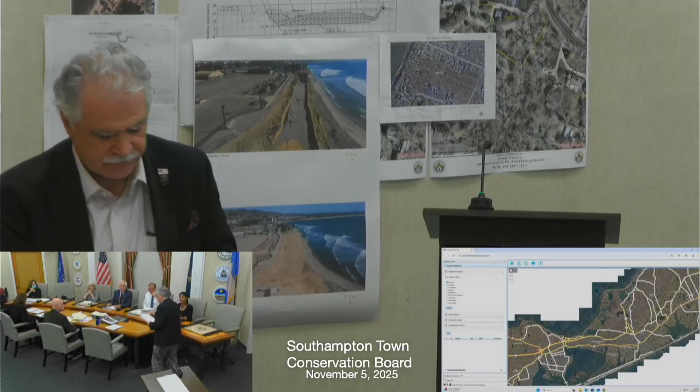One sec. I was requested to bring hard copies for everyone, so I will just hand them out. You give me the whole pile, I'll hand it. There's three there. Does Marty have one? I've seen it already. Oh, you've seen, all right, well, that's what you emailed. And I have one back in. See it? Yeah. Did you get one? I got it.

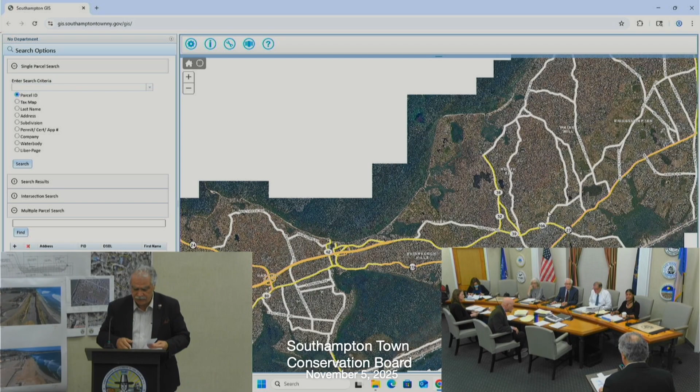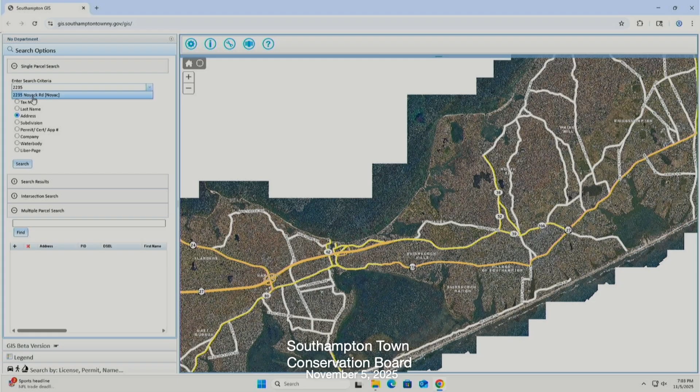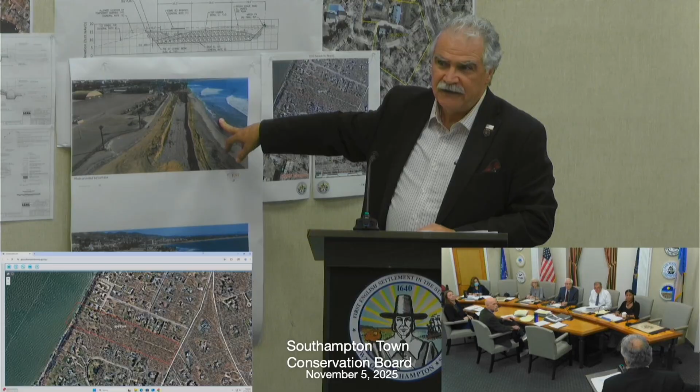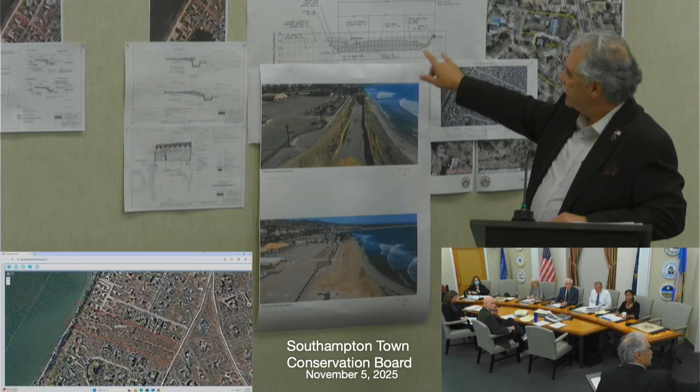So I wanted to thank the chairman for encouraging me to provide for the board a review of dynamic revetments, cobbles, berms, et cetera. I think in there you'll find that we've done extensive research on these devices, which are being used very successfully. Your timing was excellent because I ended up at a conference in California about two or three weeks after the last hearing, where this project at Surfers Point in Ventura, California, a cobble beach, actually won a national award. This is the newest section, but the original section was built over five years ago, and it's been performing extremely well. I provided you with a typical cross-section of what that looks like.

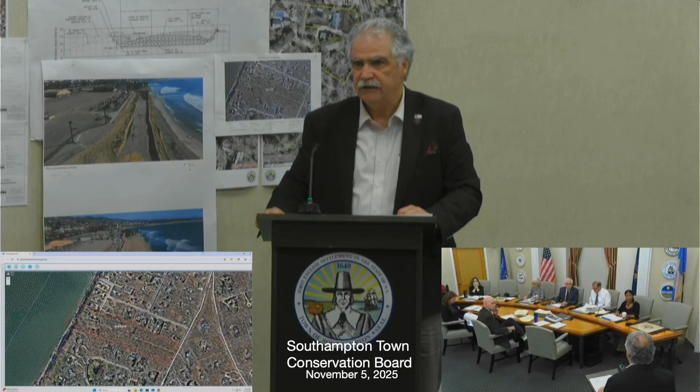I'm happy to answer any questions for the board. I think the dynamic revetment is going to work very, very well on this property in conjunction with the vegetative bluff stabilization, which we have also proposed. I agree, thank you. And Marty?

Good evening, Marty Shea, Chief Environmental Analyst for the town. The construction of a cobble berm is actually an approach that is consistent with environmentally less damaging practicable alternatives, which I have asked to be evaluated in this case and other cases where conventional stone revetments are planned.

Just for the benefit of the public, what dynamic revetment involves is the placement of considerable amounts of bay-compatible and beach-compatible cobble. The cobble is not fixed, so that it models a natural beach condition where you have considerable bay cobble that's washed up in storm events. The cobble is loose, so it allows the water and waves to shift and change the location of the cobble as much as possible.

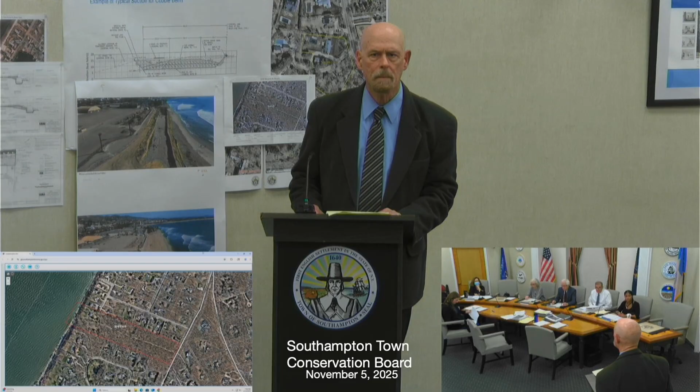Ideally, as mentioned at a prior hearing, there is not a great need for any armoring at this beachfront because there are no structures threatened. So initially I had asked that conditions be left to remain and recover on their own, possibly supplemented with a lesser amount of cobble.

And the gabion baskets are a very fixed structure. Their placement results in beach loss, and their presence also eliminates shoreline habitat for shorebirds, for crabs, for horseshoe crabs, for diamondback terrapins. So a major plus of the applicant's modified plan is that they are now willing to remove those gabion baskets in the interest of creating a continuous wide stretch of naturalized cobble beach.

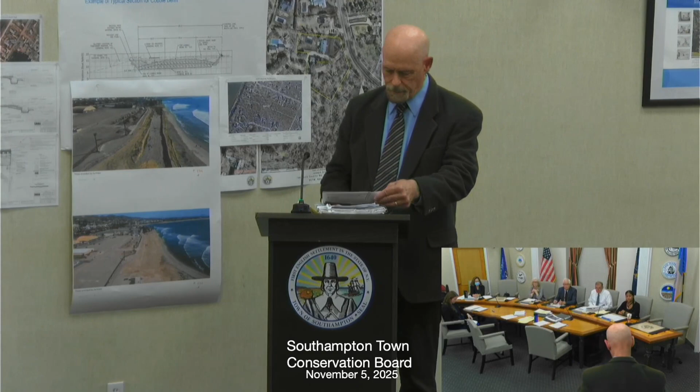To give an example of the wildlife threatened by jute netting, whether biodegradable or not: some of our native snakes. What happens is when snakes try to get through the jute netting, their scales get caught and they become entangled. Unless the netting is monitored constantly and those snakes released, they die.

Bird life is also threatened, because their talons very easily get caught in the jute netting. Small mammals can be affected, as well as deer. I saw at least one case where a fawn had caught its leg in the jute netting, and because of the sheer bluff, it snapped its leg trying to get out.

So I would highly recommend against the use of jute netting as part of any revegetation. I really don't see the need for revegetation. I think we want to get that cobble placed and then allow the area to naturally recover. Erosion is a natural process, so you'll still see bluff erosion, which is beneficial as it contributes sand to the beach. But I don't think there's a need to actively interfere with natural recovery by planting beach grass or other vegetation.

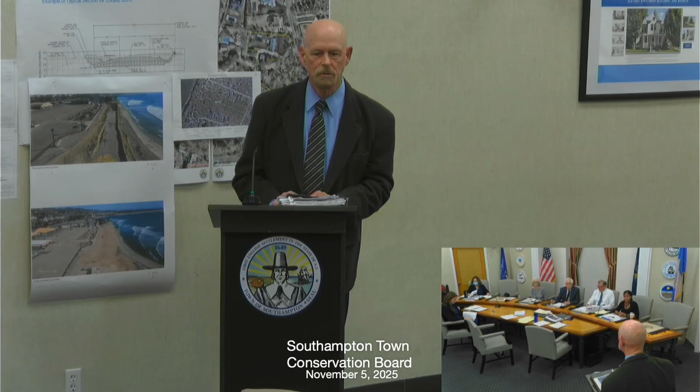So I'm recommending that the hearing be closed tonight. The applicant will need to come forward with a detailed drawing and revised survey, with greater specificity regarding the size of that cobble, the methodology for placement, and access. I'm sure I can work well with the applicant to provide those refinements to the drawing in a form acceptable for wetland permitting.

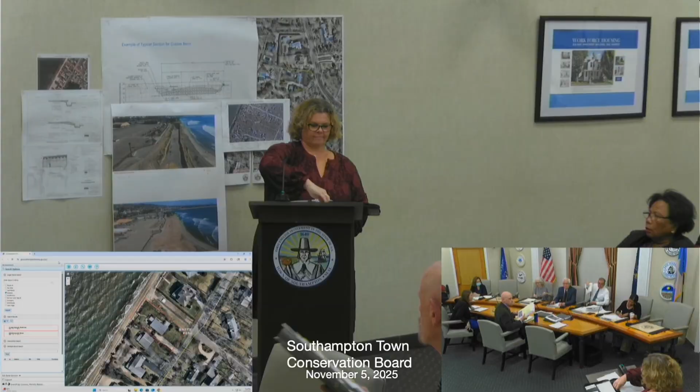We've talked about this for a while too, and I've seen the new plans. Thank you for presenting those new plans. And once again, as in the previous application, these look amazingly approvable. Fantastic.

Daphne Vaughn, Surfside Environmental Planning for 37 East Shore Drive LLC. The last time we met was middle of August. I did submit this package to the file on Monday. It includes a letter detailing all that we've done since that date, primarily two things.

One, my office went out and did some reconnaissance on beach measurements and consistency between the areas of revetted properties to the north of my client's property and the unrevetted properties from my client's and two properties south. We saw consistency with revetted versus unrevetted beach, and that's all detailed in here.

The second thing that my client did was hire Keith Masseria, an engineer who's with me here in the audience. And we came up with a revised plan that is in your submission package. We basically changed it from a solid revetment to scattered piles of medium-sized 300 to 400-pound rocks.

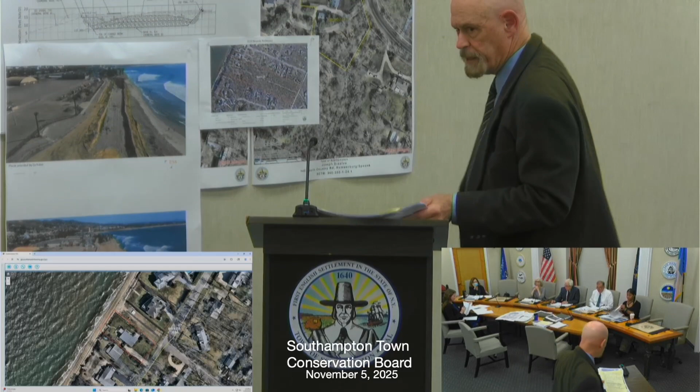Good evening again, Marty Shea, Chief Environmental Analyst for the town. I'm happy to see that the plans have been significantly modified to abandon the former proposal to install a fixed rock revetment, because revetments upon exposure can result in downdrift impacts, accelerated erosion, and beach loss, and also destroy habitat for shorebirds and other wildlife.

The house at present is not endangered at all due to the beach erosion that's occurring. It's actually located outside of a flood zone, so there was no imminent need to be very aggressive in terms of armoring. The current plans are well aligned, as the applicant alluded to, with early recommendations and sketches that I had provided to the applicant that centered on enhancing beach stabilization by placement of a bay and beach compatible cobble with a cobble berm created along the escarped headland, and with a naturally vegetated buffer established landward of that cobble.

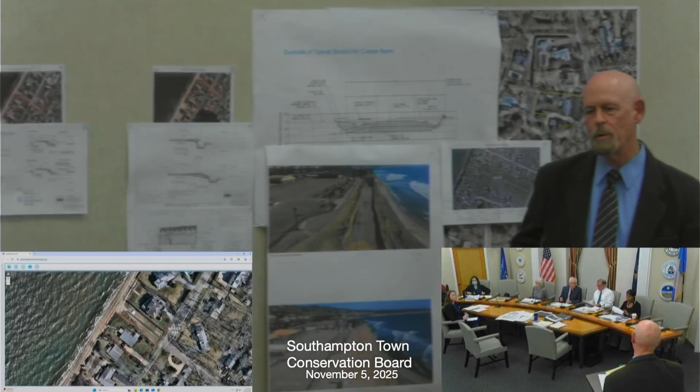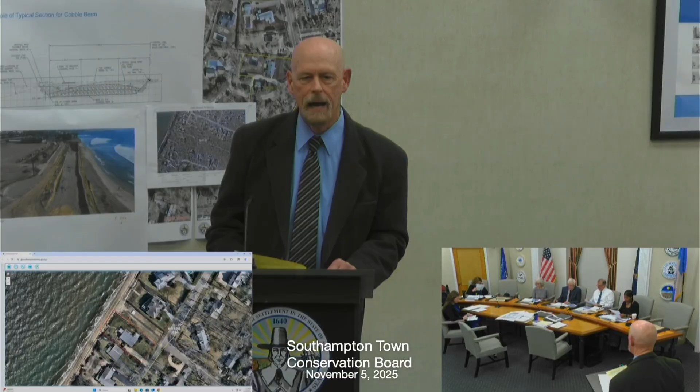So what is actually happening is, when a little bit of the lawn is being eroded and beach is reappearing, we're actually seeing a natural recovery to more extensive beach, as historically, naturally occurred at this site.

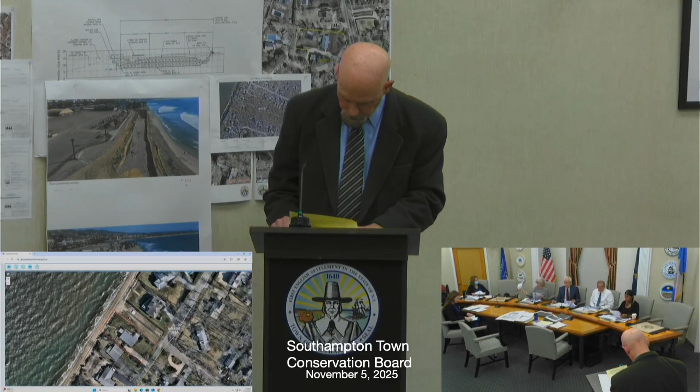So I am speaking in support of the modified plan. I commend the applicant for evaluating practicable alternatives that would have less environmental damage than a stone revetment as required by Chapter 325. That being said, the hearing can be closed tonight.

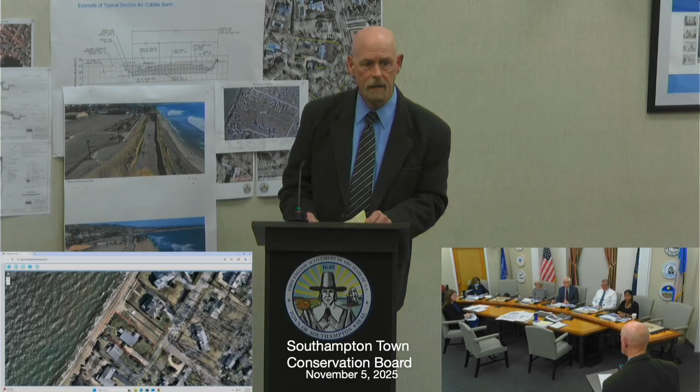Thank you, Daphne. One of the things we look at typically on a shore hardening structure such as this is the impacts that that structure might cause on the downdrift parcels. To mitigate that is a challenge, and many times it cannot be mitigated, which means it's very difficult for us to find a way to issue a permit for that. The way you've changed this around removes that concern. It appears that will not be an impact, and that's why this is an application that meets the criteria for issuance of a permit. So thank you for the work you've done.

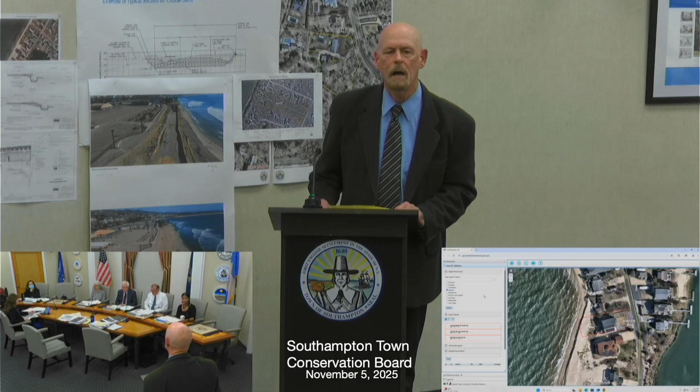A large enough footprint has been set aside in the event that they want to entertain installing an IAOWTS in the future. It also leaves sufficient area for any redevelopment plans that may come forward at some later date.

The benefit of this plan is that I don't see it resulting in significant downdrift erosion. That, of course, was a concern when a rock revetment was proposed, because south of this property the beaches are currently unarmored. So I am no longer concerned about downdrift impact.

I think this is a reasonable approach for the property. Ideally, when boulder fields are created, they're intended to be modeled after natural rocky shorelines, and I would want to see some of those boulders out in the water, below mean high water, so they can break up wave energy and tidal surge sooner before it hits the main beach.

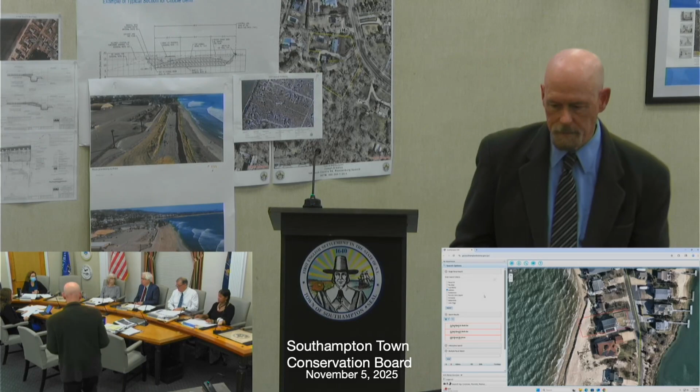Is there anyone in the public who would like to speak on this application?

Good evening, everybody. Thank you. My name is John Petrollo, and I own the house on 31 East Beach Drive, two houses away from the proposed project. I am downdrift from their house, and I am opposed to any form of rocks being added to the beach.

I am opposed for many reasons. First, I am really worried that it will cause increased erosion to my property. Most hardened structures are shown to cause downdrift erosion, and I feel it's likely to affect my property negatively. I'm worried it'll have a domino effect of more and more rocks being put on the beach as one homeowner after the next finds the need to prevent erosion caused by their neighbor putting rocks on the beach, and then it'll have to be done by the next property over.

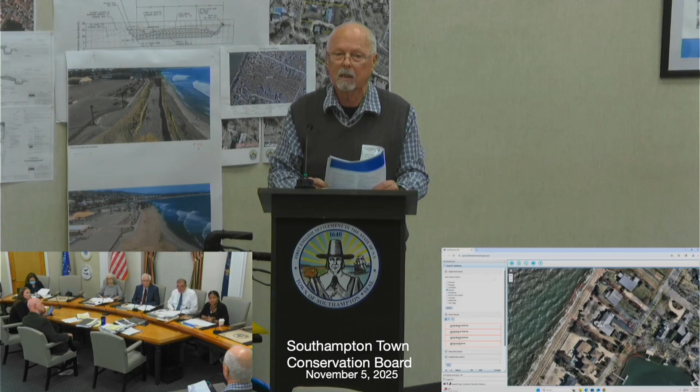So that domino effect, I'm worried it'll transform the most lovely crescent sandy beach into a pile of rocks rather than a sandy beach. I think it's likely to damage the environment, and likely to be a barrier, as more sand is washed away around these boulders, to beachcombers walking on the beach.

I appreciate that the original solid rock revetment has been changed, and I think that's a movement in the right direction, so I do applaud that. I would just like to state that I'm worried about the future of our beautiful beach, and that this will be a negative impact in the long run. Thank you.

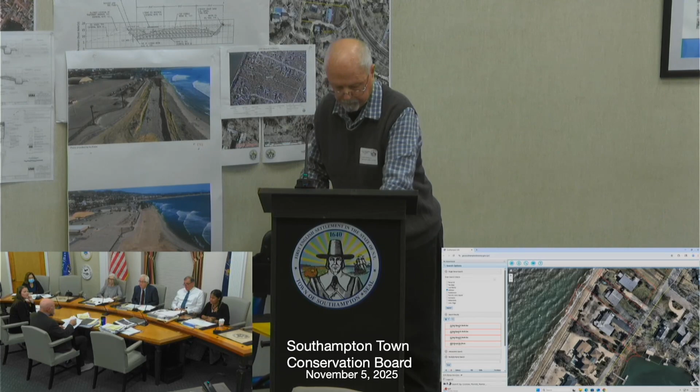Marty Shea, Chief Environmental Analyst for the town. The comments offered by the last speaker may actually relate to the next public hearing, as I believe he indicated his residence is on East Beach Drive. The hearing that's open right now is for a property on East Shore Drive, but the hearing for East Beach Drive is coming up next.

And at the property we just discussed at 31 East Shore Drive, they're no longer proposing a revetment — those plans have been abandoned. But as we get into the next hearing, you'll learn that there is a fixed stone revetment proposed at that property. I may be wrong, but I'm just offering that for clarification.

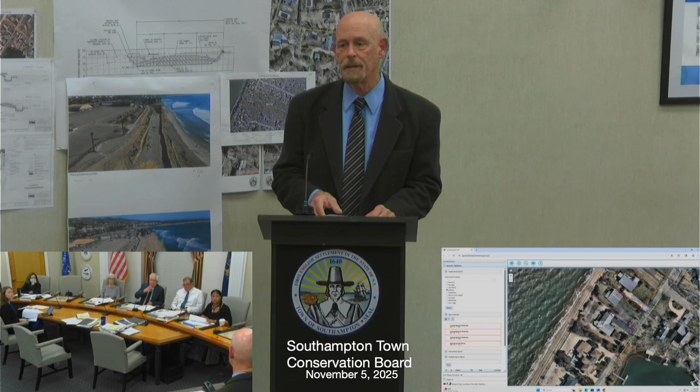So we're going to take those comments for the next hearing and delete them from this hearing. Is there anyone in the public who'd like to speak on this application? Is there a motion? Motion to close the public hearing. Second. All in favor? Aye. Opposed?

Case A025019, Stephen Tempesta and Jennifer Tempesta. This is a new public hearing, it has not been opened yet, and we do have affidavits of posting and mailing in compliance with the town code, so the board does have jurisdiction. Thank you.

This is the same. Same package? No. Thank you.

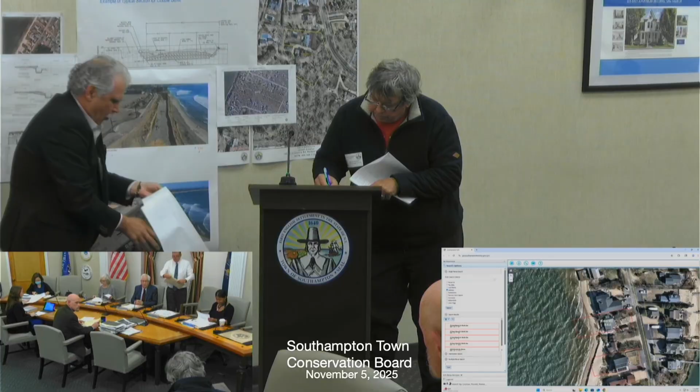If you bear with me for just a moment, I want to hang these photos up. I didn't want to cover up anybody else's exhibits, so I waited until just now. Yeah, got them right here. Probably just a file, but I can hold on to them. Yeah, no, I didn't see them.

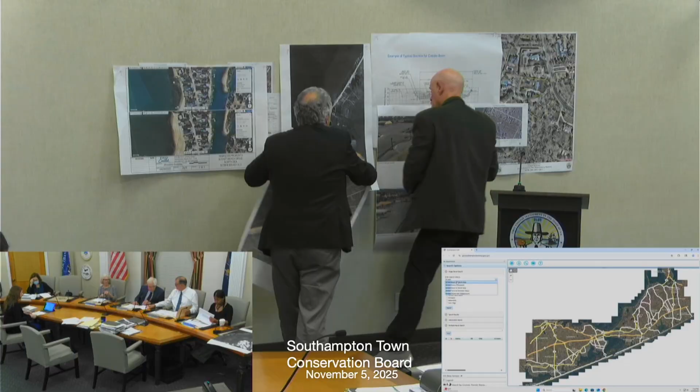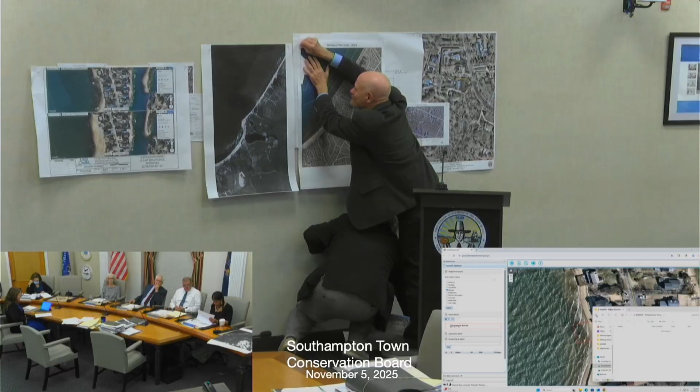Nothing like walking around the rest of the night with push pins in your shoe, you know. It'll be the first time. I'll take it. Yeah.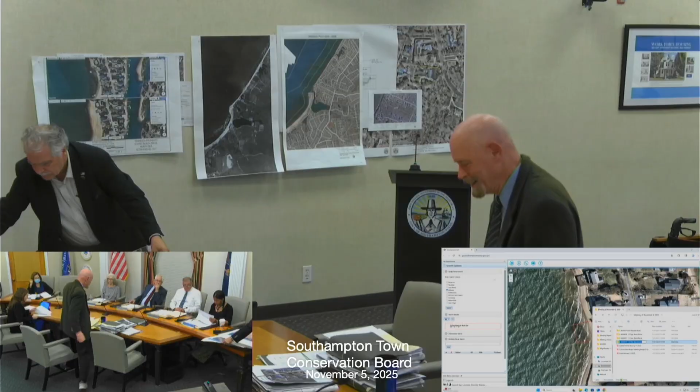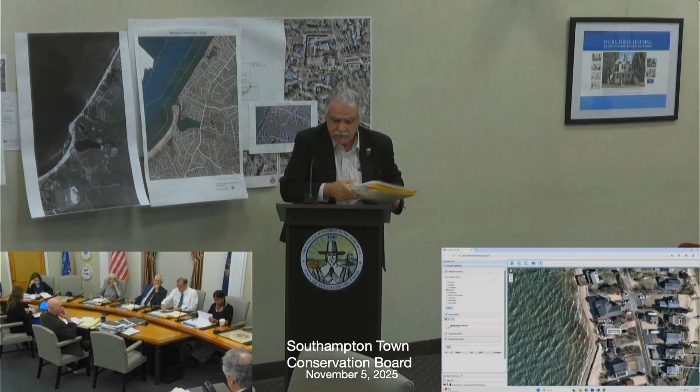For the applicant, Aram Terchunian, First Coastal, Westhampton Beach, New York. Thank you for the opportunity to address the board.

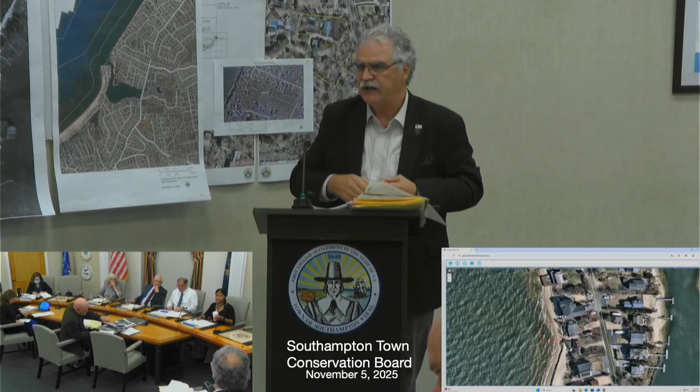In the original application, we supplied a project narrative, and I don't want to go through every page of it. I know this board is very thorough and reads all the massive materials we generate. But in this analysis, we first looked at what's going on at the immediate site, and then looked farther to ask why that's happening. So this is just a blow-up of a diagram that's in your narrative.

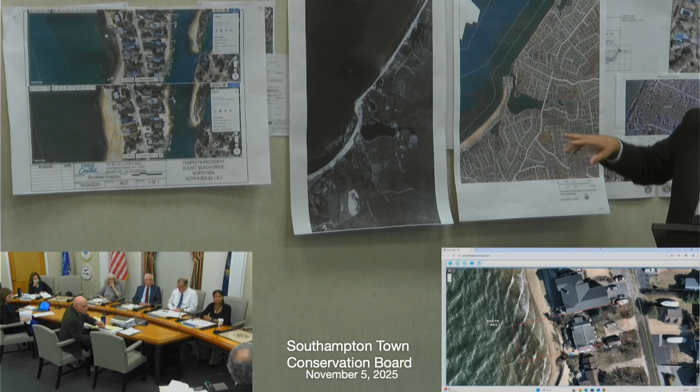I realized tonight when I was going over my work, it's actually a scaling error. I thought it was 1 to 30 inches, but it's actually 1 to 60 inches. So instead of 37 feet of loss in 2 years, it's actually 75 feet of loss in 2 years.

This situation, I would like to persuade you, is unique. This is not a case where an updrift structure is reflecting wave energy and causing downdrift erosion. This is human intervention at the governmental level that has completely changed the sediment dynamics of Wooleys Pond and Wooleys Pond Inlet. This is a 1930 aerial photo from the Suffolk County GIS.

Right here is Wooleys Pond. What you don't see in this photo is the channel that goes out to the bay. You do see it in this 2024 photo.

What happened is there was a very rich sand system that came down to this natural point. There was a tiny, tiny tidal creek, a sinuous tidal creek that wound through a Spartina wetland, which Suffolk County dredged out and created the inlet.

That completely interrupted the sand supply. So instead of having these beautiful shoals downdrift of the inlet, which nourish the beach as sand is bypassed around the point, now we have a complete literal block. Think of it like a stress test where they tell you you've got a 99% block and you're going to the hospital now. That's what's been going on here since the 60s.

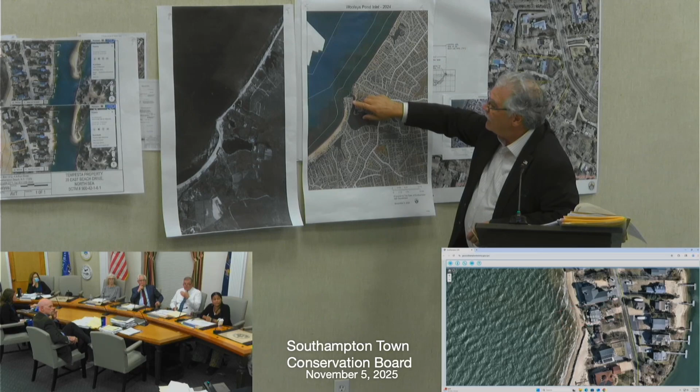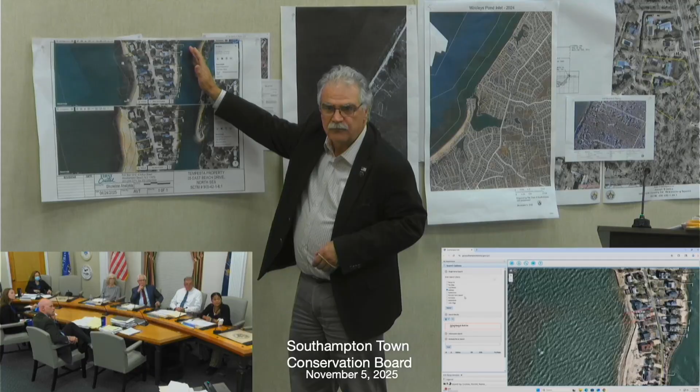So no matter how much sand gets placed here, it's going to be gone in 2 years. And that's exactly what happened. Suffolk County dredged the material out from the channel, deposited it along this beach, and the area downdrift of the inlet immediately eroded.

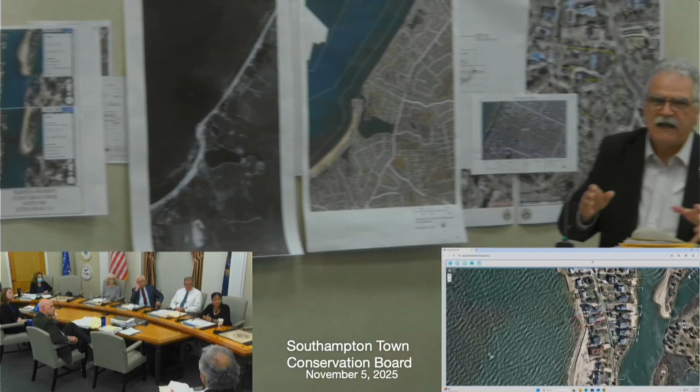This creates a very difficult situation because we can't use beach restoration, which I would prefer to do, because it simply won't work. We went through another series of alternatives, including a low-sill offshore structure, a vertical bulkhead, beach nourishment with or without a dune, with or without vegetation, and vegetation alone. None of those solutions address the issue, which is a complete block of all sand moving in the system because of governmental intervention.

The properties to the north of my client's property have protected themselves against this government intervention by putting in vertical bulkheads. We don't want to do that. What we have proposed instead is a sloping rock revetment, and the reason we've proposed that is multiple.

I would propose a dynamic revetment here if I thought it could work, and if I could get a permit from the state. Neither one of those is accurate, and here's why: in order for a dynamic revetment or cobble beach to work, it needs to have a gentle slope of about 1:8 to 1:10.

If we're going to build a structure that's 5 or 6 feet high on the landward side, we need 50 or 60 feet of beach seaward of that in order to create a slope where the waves will break and the energy will be dissipated. We don't have that — we have like 25 feet. In fact, depending on the tide and wind, the water is running up to the deck. There's virtually no room.

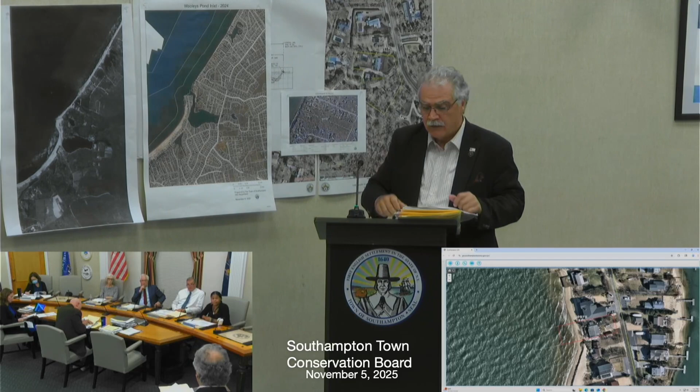So there's a bunch of other aspects here, one of which has to do with lot coverage. Right now the lot coverage is about 23%, and we're asking for a modest expansion of about 200 square feet, which is literally the size of the table we're all looking at. It would push the coverage to 26%.

So I looked at that and said, okay, I understand there's a concern — we don't want to increase lot coverage. But I went back and looked at the old surveys. In 1984, Squires and Holden did a survey here; the lot was 18,000 square feet. In 2022, a survey was done and the lot was 7,600 square feet. Now it's about 6,000 square feet.

So had we applied in 2022, our lot coverage would be fine — we'd be under 20%. Curiously, just down the road, there was another property that came before the board that the board issued a permit on. When they initially applied, their lot coverage was over 20%, but then the county dredged and placed sand, and all of a sudden their lot coverage is now 17.8%. So what we're saying is lot coverage is important, but reasonableness is important too.

It's not just a number. This is a very modest home, and we're looking for 200 square feet of additional lot coverage. Based on the fact that this went from an 18,000 square foot lot to a 6,000 square foot lot as a result of government intervention, I don't think that's a tremendous ask. And of course we can only get that coverage from the zoning board, which we'll have to go to for pyramid and for height relief because of the new sea level rise criteria and the narrow size of the lot.

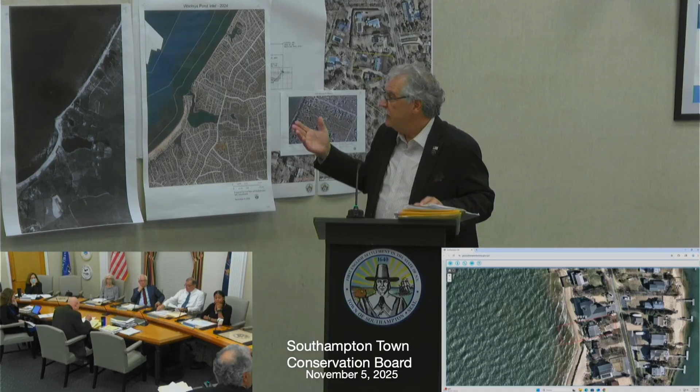If you're redeveloping the site, moving the house as far landward as you possibly can, and then protecting that house, because if you don't, everything you did is just going to be undone. I think that's a very reasonable way to approach this type of situation.

In fact, this is very much what was done on a site. Marty was kind enough to share some of his initial thoughts with me, so I did some research today. I'm going to prepare this in a more formal manner, but the board has done this in a couple of different cases where they've looked at a site that is highly constrained, and as long as the applicant is making their best efforts to comply, this board has approved it.

In this particular case, without the addition of the revetment, we're just going to be back in here a year from now when the water's under the house, instead of being able to be proactive here. The other part is, this inlet will be dredged again, the sand will be placed here again, the beach will come back again, and then it'll erode again. So this revetment we're talking about is really a fail-safe, last-ditch effort.

So that is my presentation to the board, and I have Jennifer and Stephen Tempesta, who are the owners, and I believe Jennifer would like to address you.

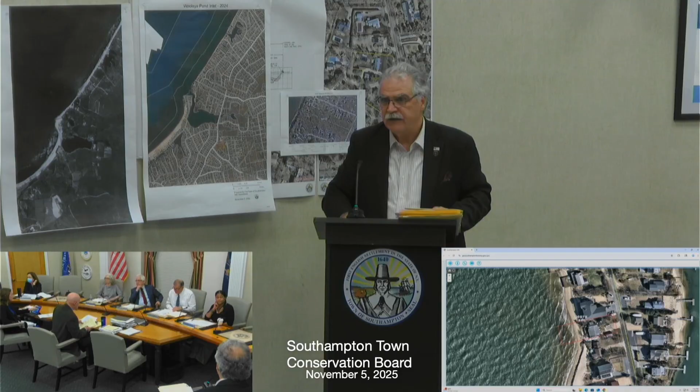Good evening, everyone. My name is Jennifer Tempesta. I own 35 East Beach Drive with my husband. I'll just start out by giving a little background on all of this.

Aram's photos are amazing, they're so helpful, but I also have some photos that I've taken that really show you what it's like to be in our home and how close the water is coming. If you could go to the next slide, please. Before I get to the photos, which really show you there is an imminent problem we have to solve here, I'll give you a little background on us and why this is so important to make sure this property does not erode any further.

We have been residents of the town for many years. We purchased this property in 2022, and since then have been devising a plan to make sure we can be there long-term. We are seeking a solution that will protect the property in an environmentally sound way. As Aram said, we are very much constrained by the size of the property.

We love the beaches, just like Mr. Petrillo said earlier, but there's really no sand left. There is no beach where we are. So we need to do what we can to protect what is left. If we go to the next slide.

So this is September 26, 2022, after the dredging, after the sand placement. I'm standing in the water taking a photo of my modest home on East Beach Drive. It looks pretty great. You've got a lot of sand there. That is a nice beach.

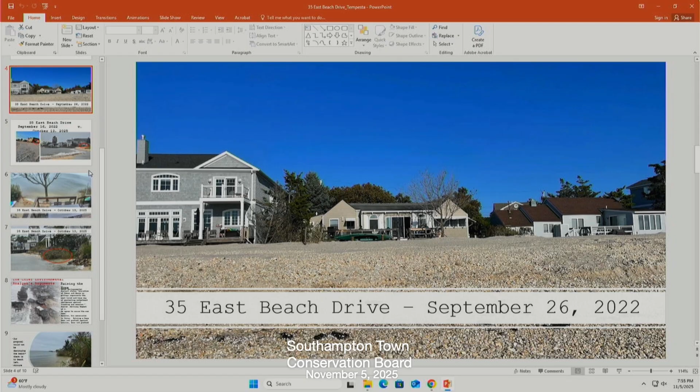We go to the next slide. This shows two different time periods. On the left is September 2022, we've got a ton of beach there. On the right, October 2025, our house is circled in a little red line, you can barely see it. But what you can see is that the water is practically on our deck.

Can you go to the next slide, please? This is our home October 13th, right after that nor'easter. The water is touching our deck. There is no room to put a dynamic revetment here. There's simply no room.

If we leave it as is and we don't put in some sort of permanent structure, the house is going to be underwater. That is the only reasonable conclusion based on the amount of erosion we've seen. Take a moment to take in this picture, what a difference in the shoreline from 2022 to 2025. It is almost unbelievable. We are here respectfully asking you to let us protect our home.

It cannot be the intent of Chapter 325 to permit properties and homes to be destroyed. That just cannot be the intent of that code. We've got to be able to do something that is responsible and well thought out and supported by science and the facts, and that is what we are trying to do. We hired experts from First Coastal and DeLandro Engineering to help us, and this is the plan they came up with. If we go to the next slide.

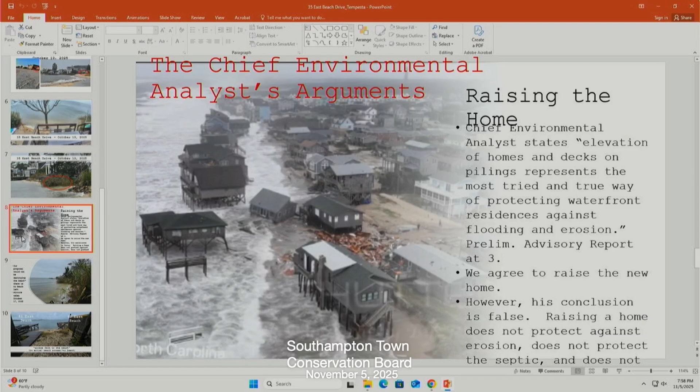There's just one more picture I'd like to show you. I understand the Colony Club owns an access path to the beach. That's on the next slide, please. And this is the access path. I took a photo. This is between 43 East Beach Drive and 45 East Beach Drive, a couple houses down from where we live at 35. This is not an access path to the beach. There is no beach. That's a problem, right?

What we are proposing to do is not going to affect anyone's beach access. What we are proposing to do is just going to protect our property and our home. I want to go back to a few slides earlier where you see the water coming up to the deck. I think this is a picture of what is happening at our house today. And we need to do something immediately, with really prompt action, to save our house. Thank you very much.

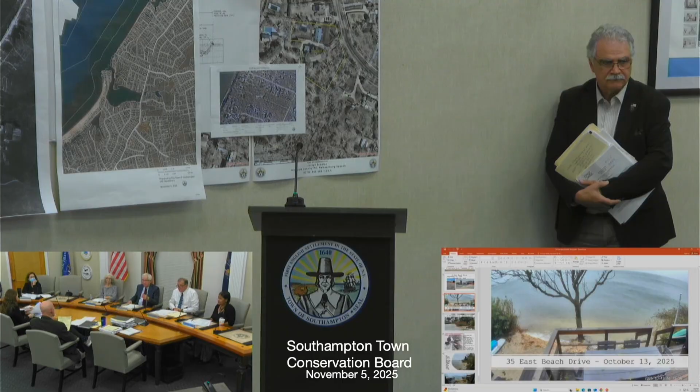Yes, sir, I'd like to make a comment, please. Well, wait a minute. Marty's going to speak first, and then there'll be a chance for the public.

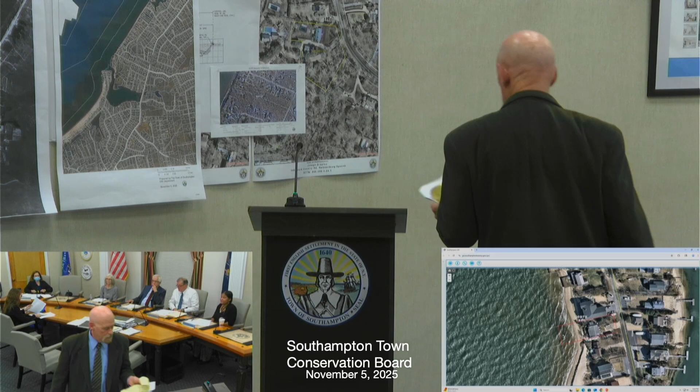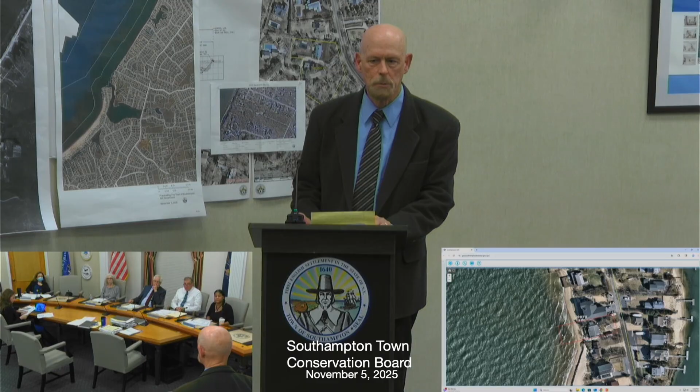Good evening again, Marty Shea, Chief Environmental Analyst for the town. I would start by saying that in view of the lot size constraints, and in view of the risk of erosion and flooding, the applicant should be coming forward with a plan for a much smaller home than is being proposed at this time. The applicant is looking for the board's approval for a house footprint and deck footprint which would be significantly larger than what exists at present.

In cases where considerable relief is needed from the wetland permit issuance standards, and you're dealing with a pre-existing non-conforming home, your plan should be to come forward with a plan that decreases the level of non-conformity at the site. Initially, you would look at a plan whose coverage does not exceed the existing coverage, but in a case like this, you want to entertain a house and deck that's significantly smaller than the dwelling that currently exists. In this zoning district, in all likelihood, the minimum allowable coverage for the footprint for the dwelling is probably 600 square feet.

In the case of a two-story residence, the minimum allowable square footage would be a combined total of 1,200 square feet, meaning if you build a modern box-shaped house or something similar, you would have 600 square feet of first floor and 600 square feet of second floor.

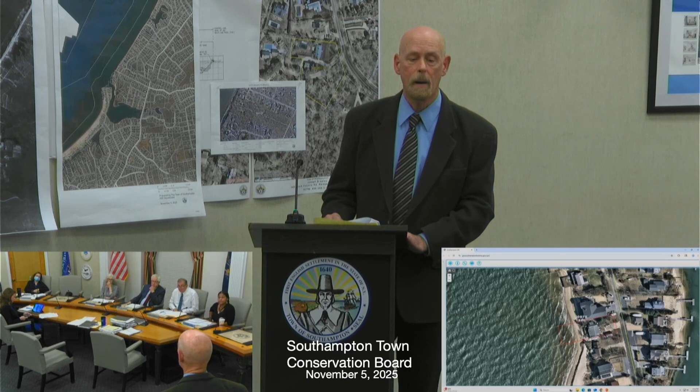But the major risk is downdrift impacts. As this board knows, the beaches to the south of this are unarmored. And if we are to entertain armoring this beach, we have to be as sure as we can be that that fixed armoring is not going to result in downdrift impacts. Yes, the dredged material downdrift is going to erode over time as well. But will the installation of the revetment actually accelerate erosion to the south, thereby adversely impacting properties?

So the board not only needs to consider the impacts on the bay, the impacts on wetlands, the impacts on the beach, the impacts on erosion as a consequence of building a revetment, but their charge is also to make sure that what this applicant does on this property is not going to adversely impact properties downdrift.

Now, the applicant, I believe, has indicated that the southern reach of the revetment is going to descend and maybe curl, and that will diminish downdrift impacts. But at present, based upon the data that has been submitted, I'm not convinced that that'll be sufficient to avoid downdrift impacts.

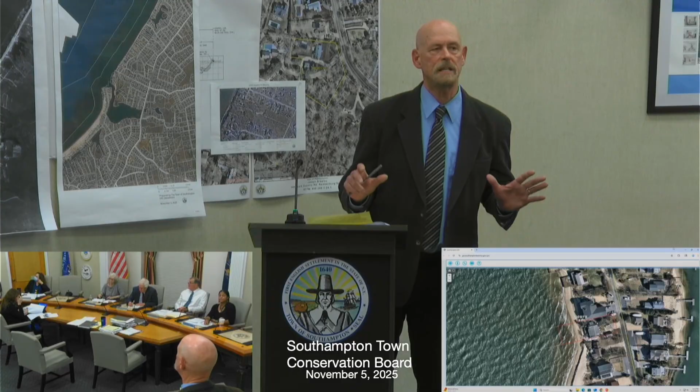Because the end result of a continuum of revetments or bulkheads—and I don't support a retaining wall, I would agree with that, I'm surprised the DEC would make that recommendation—the end result is that you're going to lose the beach. You're going to lose this entire stretch of beach seaward of that armoring. And this stretch of beach is going to look like the majority of the shorefront properties along the Little Peconic Bay, where, as a consequence of historic bulkheading and revetment construction, there is no beach. The beach has been entirely lost. What actually happens is several things.

Armoring results in a conversion of the type of tidal wetlands from more of an intertidal wetland, to submerged tidal wetlands. So the habitat is not only being lost, it's being converted to a different kind of habitat. You also interfere with the public's foreshore rights to access and walk between mean low and mean high water on the beach.

You lose all values for wildlife in terms of shorebirds and waterfowl being able to feed along the wrack line. So we have to consider not only the site-specific impacts of construction of a revetment, but the potential cumulative impacts long-term on this stretch of beach.

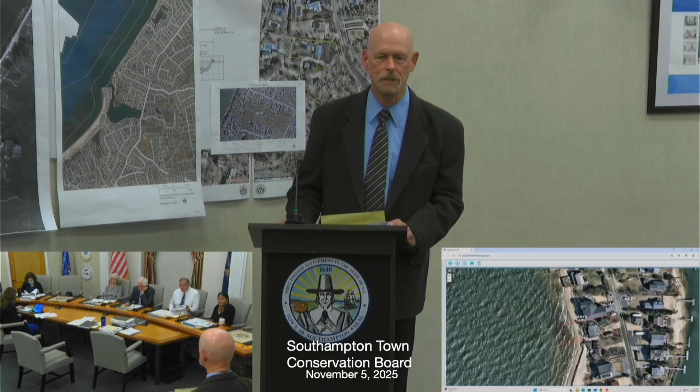And the house absolutely needs to be, the footprint of the house and deck absolutely needs to be scaled down. The last thing you want to do in a property that's threatened by erosion and flooding is to build even a bigger house. That's going to be a greater risk than the current house.

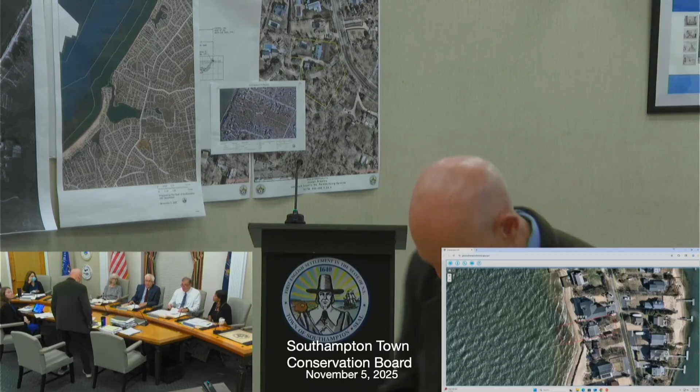Thank you. Thank you, Mike. I'm sorry? Sure, you can. Well, let's wait a minute. We'll open up to the public soon, but not yet.

Any questions by the board? Not yet. Do you want to respond to anything, Earl? Well, I figured I'd let the public speak and then I'll respond. Okay.

We've heard a lot of testimony on this application. The testimony we hear on such applications with shore armoring are fairly consistent, both by the applicant and by this board. And I believe it's safe to say that there's a great deal of research that shows that armoring a shoreline such as this will cause additional erosion, particularly downdrift of the project.

For us to issue a permit, impacts need to be mitigated. If we cannot mitigate those impacts, then the project does not meet the conditions for issuance of a permit. So we need to work towards, as the law recommends or charges us, to look at alternatives. And there are always alternatives.

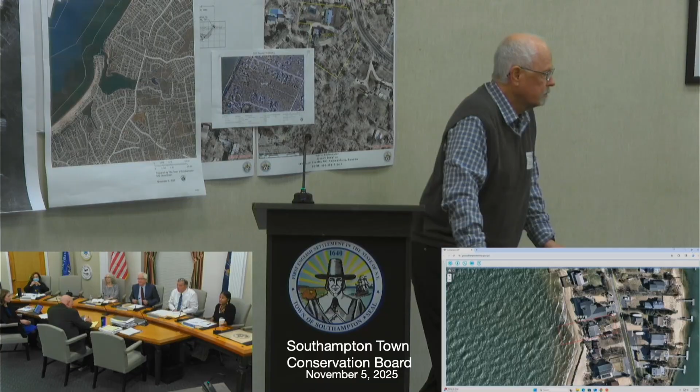This is a recent picture. I think everyone can see what happened to the beach there as it eroded. It built a wall, or whatever you want to call it, that was never there before. That happened very recently.

Down the beach, a few houses north of the pavilion, the sand stopped eroding there, and every house has a very large beach. As a matter of fact, they have my sand, and they have the Tempesta's sand and Sarkozy's sand. I've had conversations with Marty about it.

That's our sand down there, because it washes down and deposits right there. So there must be something that causes that beach to stay large. Am I making sense? It erodes, yes, it looks like it's heading for Caruso's house, but farther down, the beach does not disappear. Never does it disappear. Just like on West Beach Drive, nothing.

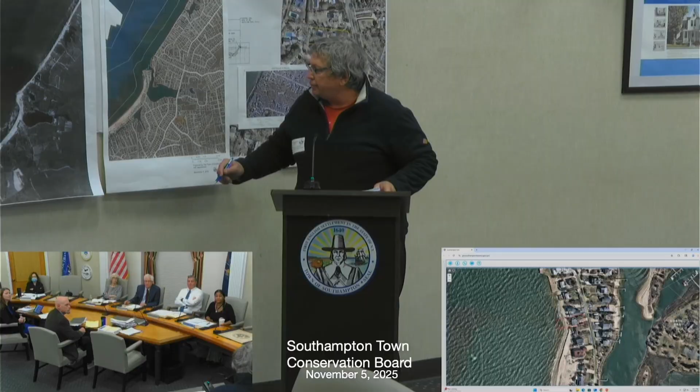But what we got going here is, as Aram said it best, we got the flow of sand going from east to west. We've got government intervention, which is where that channel came from. And on this end right here, we've got a house that's got a bulkhead around it, which is causing all kinds of erosion here, and elsewhere.

We've got emergency boats in North Sea Harbor, and they do dredge that on an annual basis. So all of the sand ends up down by Towd Point, which is North Sea Harbor, which has just been dredged. Why can't they take that sand as they're dredging it and pump it up to East Beach Drive?

You're going to have the flow of water, but if you get the sand out beyond those bulkheads, there's a good chance you could get a stable beach. Because even if you go the other side of the inlet into Wooley Pond, which would be here, you got rock revetments here, and here.

Then you got Peconic Bay Avenue, and then there's no sand beyond that either. So that natural flow of sand has been interrupted by the government intervention. And whoever gave the permit to the guy at the end of East Beach Drive to put up them bulkheads, hopefully he's not here, but that was not a very good move.

And you know what? First Coastal just said that we can modify our proposal, we can modify this. Once it's done, it's done. I think that there's many solutions, but that's not my business. But it's an urgency, because the Tempestas, my family has a house right next door, and the water is practically coming in the front door. So it is urgent, but a permanent solution has got to be arrived at.

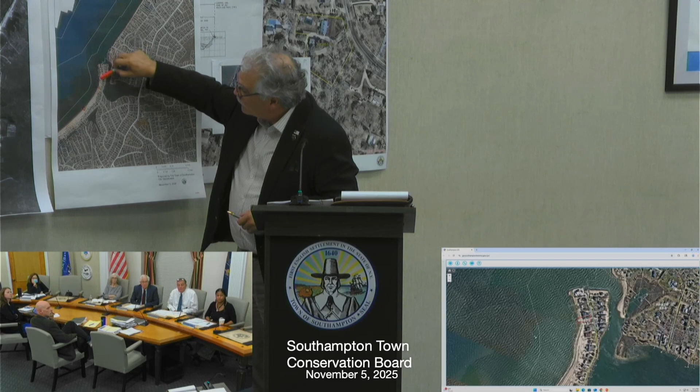And the problem is the stable configuration is under a couple of homes. And no matter how much sand you put there, it's going to go back. Now, the other thing that Judy mentioned was that she doesn't have any sand on her beach, she has cobble. Well, that's what's happened. All the sand gets washed away and the cobble's left. The problem is this increased wave energy here that's caused by the inlet being cut and the interruption of the sand, the cobble that's there is not big enough. You go there, you'll see it's pebbly, and there's some cobble stuff up to 3-4 inches, but that is not stable there as well.

So I just wanted to introduce those coastal processes ideas to you, because when I delve into them further, it's one of the reasons that we have rejected some of the alternatives is because the physics of this site don't allow them to occur. And I think one of the things I would say to the board is that we can't ignore the physics. And I will give you a lot more detail, but what's fascinating for me, Judy, is that you picked up on the exact thing.

It's stable down here. In fact, nothing we do, and I'm telling you, unsupported, but I'm going to tell you, what we do up in here is not going to have any effect here, because whatever sand goes here immediately moves there, and that's why that point is stable. And it's stable over time because the frequency of the dredging in the inlet is such that enough sand gets there to maintain stability. And if you go down to that pavilion, they have a new Pioneer Dune accreting out in front of it, and it is all the sand that came from here. It's just not stable. So anyway.

I also handed up to the board late on Friday, something that I've given to you. I'm not going to go through this, but there were a number of statements made in the preliminary staff report which I don't agree with.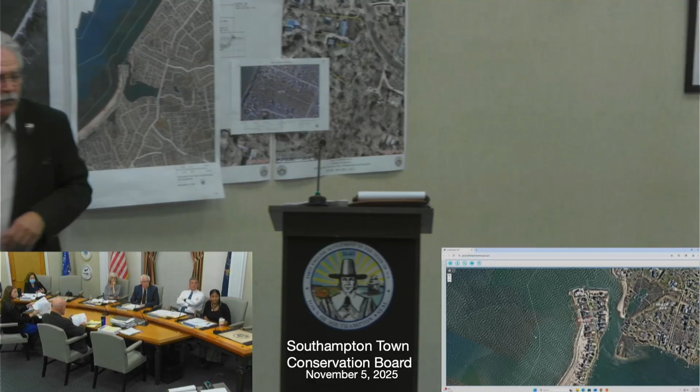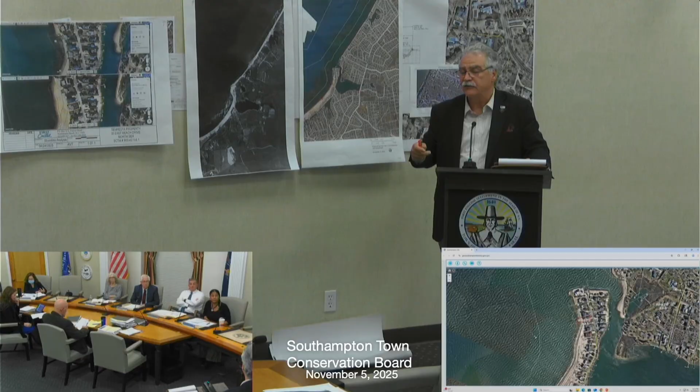One of the statements that was made, I'll just illustrate, is that somehow an eroding beach is an attractive habitat for horseshoe crabs and other things. It isn't. The whole thing is that if the beach is eroding, even the benthic invertebrates are not stable. They're being removed from their habitat and then having to recolonize again. So eroding beaches, shorelines or cobble beaches, yes, they do have some environmental value, but it's very reduced by the fact it's eroding.

So the wetland that we're talking about here is highly compromised as we speak today, and that's because of the cut at the inlet. So what I am going to do, if you don't mind, is look at my notes, come up with a list of information, and then please add to that list or subtract. That'd be great.

I think that you want some more description of the alternatives. The alternatives I'm hearing are, from Marty, reduce the house, or wait until they dredge again and then do something, which I think we can all agree the Tempestas don't have time to wait.

The other thing I heard, which was actually very interesting from Tim Mahoney, was why can't we take the sand from North Sea and move it up here? You can, it's just really expensive, and it's not stable in that area. That technique is something called backpassing. You may be familiar with bypassing, which is when you dredge the sand from the inlet and bypass it around. Backpassing is the opposite: you take it from where it's collected on the downdrift and move it back to the updrift. It's actually a technique that we do use.

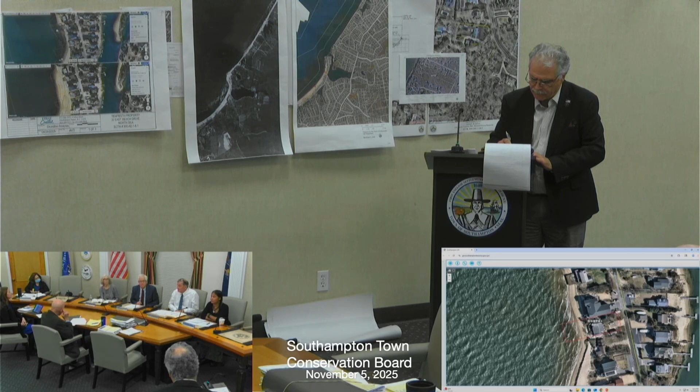The other thing I heard was that you would like some quantitative information on the potential impact of this structure. Is that correct? Yes.

What I'm hearing you say is, from your physics class—I did really poorly in physics, I got to tell you—let's just say you couldn't do it in one season, took you another 30 years, but you got there. You seem to be suggesting that there are few solutions given the size and the dynamic nature of this area. It really limits our choices.

The other thing I want to point out is that I'm getting a tremendous amount of pushback from the DEC. So if we could build a cobble beach along 500 feet of waterfront extending 100 feet out into the bay, that's something I might consider. But doing it on a 63-foot wide lot, no, it's not going to work. It simply doesn't work. And I don't think that, based upon the current urgency of the Tempesta situation, forcing them to organize a dozen property owners into a collective project, or to wait for the county to do something, is a reasonable course of action.

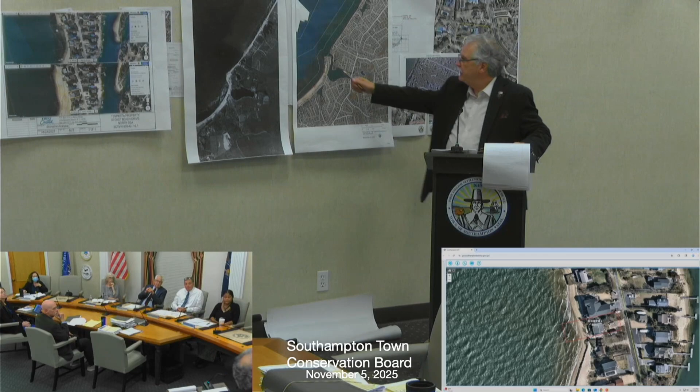If it went out another 30 feet. No, but this point right here? Yeah, because that's the key point where that's where the energy initiates.

But again, everything comes back to the sand supply. This is after the fact. Had the sand supply not been interrupted, nobody would be here today talking about it. So let's go sue Suffolk County. No, just kidding.

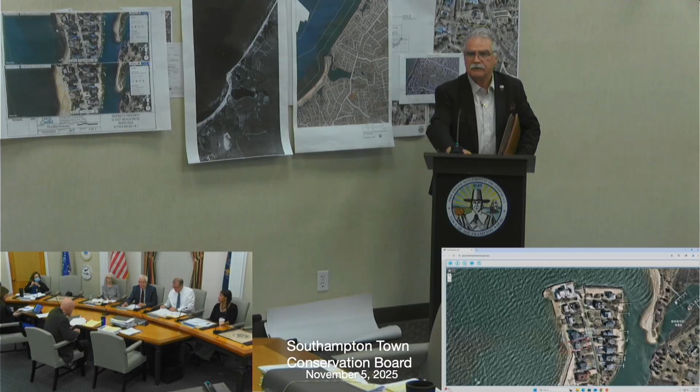All right, I have my list. I'd like you to schedule us a time to come back, but I believe Mrs. Tempesta would like to address you, if that's okay? It may be that during the time between now and the next time we come back here, there can be some communication between this board or this office and you, but either way, to try to work through some of the direction where we're gonna end up. Yeah, very good. Happy to do that.

Very briefly, just to make sure we are taking concrete steps to move forward. I know that Aram has action items, but because there is some urgency to this situation, we do want to make sure we get a next hearing date. And I did want to seek clarification on one thing that you said, Chairman Ludlow.

You indicated it's highly unlikely that a permit would be granted for a revetment. If we present scientific information that shows that the risks to the neighbors because of what we plan to do is negligible, based on if we hire an expert, if we provide you with strong scientific data, would that be enough to change your mind?

Notice I did not say absolute. There's a reason for that, and that is because I don't know enough about it. But I do know that I've heard some of the same principles over and over and over again, and that's why I said highly unlikely. But you are correct, if it turns out that there is some physics going on here that's beyond the scope of the alternatives we've looked at, we need to pay attention to that.

And if it actually is the case that this is one of those extremely rare cases where a shore hardening structure is necessary, I wouldn't want to stand in the way of that. Understood. Thank you. Yes, sir.

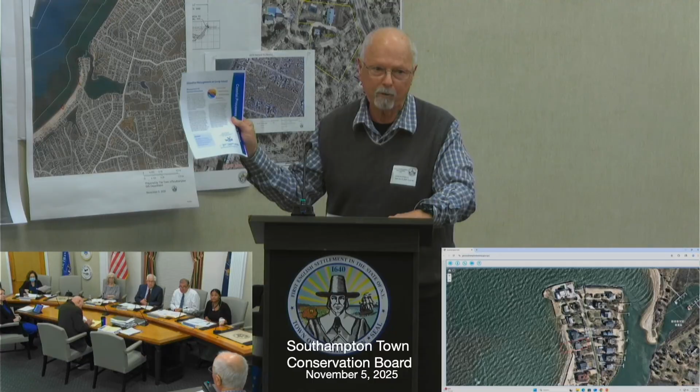I'd just like to make a quote from a scientific paper called Shore Management on Long Island. And I would like to quote from it in respect to revetments specifically. It says, 'These structures can increase erosion rates on adjacent lands.' That's science. I have copies of these for everybody if you'd like to have 10 copies.

I'd like my sister to hold up a poster that I've made from this article, and it shows this way, and you can see a revetment. You can see where beach erosion is affecting the downdrift areas. That's me. I don't want you to approve a revetment to help one property.

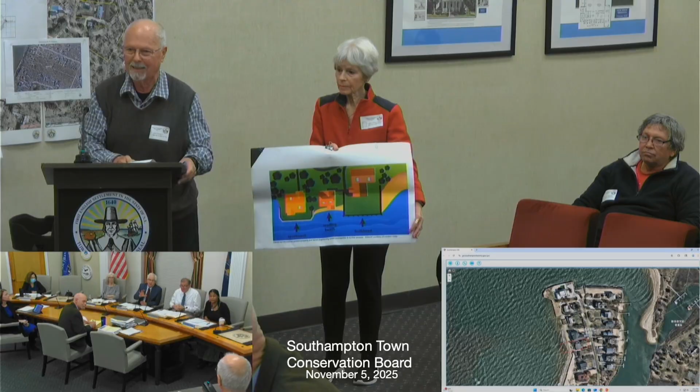You've said that before, we got that. Yeah, we got that. Saying it again doesn't help. It just wastes our time. We got that. I'm finished, thank you.

We're moving beyond the generalities in this hearing. We know the generalities. We've expressed them. You've heard them. What we need on this, for this application is specifics.

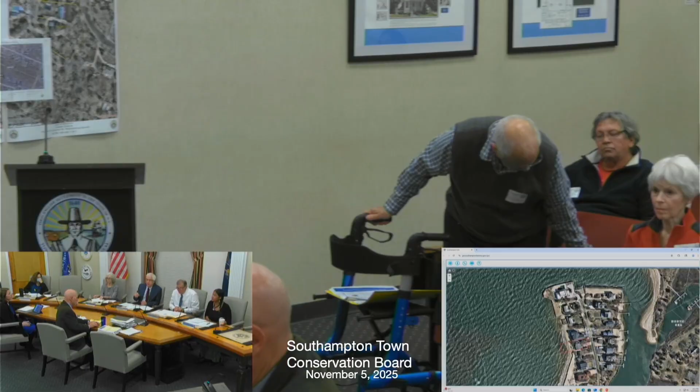We want to know what's going on right here, not what goes on across Long Island. Is there something different that's going on right here? If there is, we should pay attention to that. If we're being caught up with some verbiage here and there's not, we need to pay attention to that also. So we need to discern those things. We need a little bit of time to do that.

We do have time in a month to come back with a hearing. I don't know if that's enough time for you or for us. Just one moment. If you want us to consider some of that information, that article, please make sure Karina has a copy of that for the record. It has to be stamped into the record, or it won't be reviewed.

Yeah. Then in 2 weeks, there are 2 hearings. December 3rd, there's 1 hearing, and December 17th, there's 2 hearings.

Each one of those dates has a new item, which takes longer than adjourned ones. Just to give them an idea of how much room they have to fit themselves into for the next month or so, month and a half. I don't see anything in January yet, do you? We don't have anything scheduled so far. Aram, how much time do you need?

I'd like to come back in a month if you have room on the calendar. We do - December 3rd or 17th. I'll let you know within a couple of weeks. Okay.

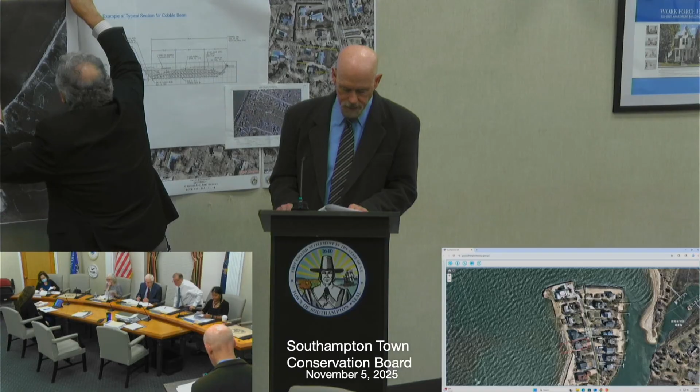Advisory reports, Townsend of Noyac Road subdivision. It's a final subdivision plat that's been referred by the planning board for a tract at 4490 Noyac Road in Noyac. There are 3 suggested comments. The first indicates that the final subdivision plat, with the latest revision date of September 2nd, 2025, is consistent with the recommendations of the Conservation Board's January 8, 2025 advisory report, which requested that street trees be planted.

Second, in furtherance of such advisory report, the Conservation Board asks that the driveway for proposed Lot 2 be constructed of pervious materials and equipped with subsurface drainage in order to prevent excessive stormwater runoff onto Noyac Road. Thirdly, the existing asphalt drive for proposed Lot 1 should likewise be converted to pervious stone.

Sir, had you started to say something? I don't want to interrupt. Yeah, that's all right, go ahead.

As required by the town code, the planning board has referred a subdivision that is a lot line modification for 4 lots on Noyac Road in Noyac. They front on wetlands. I did have an opportunity to work with the Planning Division to ensure that the conditions are consistent with the Chapter 325 standards. So you do have draft conditions of final approval for this lot line modification that are compatible with Chapter 325 and thus can be approved by this board.

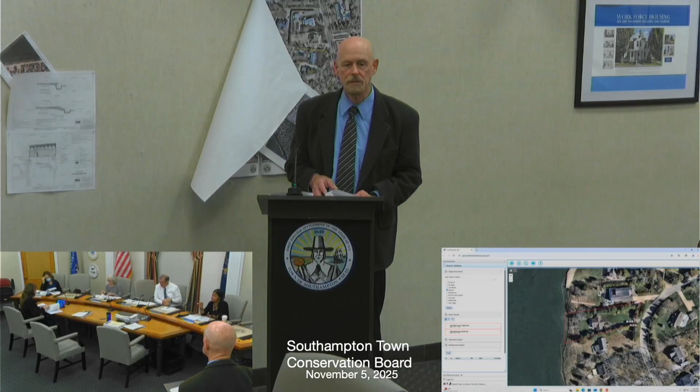Preliminary review of strict determination, A024028, Douglas Bowger. This application relates to a residentially developed property on Turtle Cove Drive in North Sea that contains town and state regulated tidal wetlands. The applicant has put forward a redevelopment plan requiring considerable relief from the wetland permit issuance standards. There is a preliminary advisory report on file dated October 29, 2025. Significant additional information is needed to make a determination.

As such, a public hearing needs to be scheduled. Second. All in favor? Aye. It be resolved that the board schedules a public hearing for Douglas Bauger for December 3rd, 2025, and that a notice of public hearing be published in the town designated newspaper pursuant to Chapter 325, Section 325-8C of the Town Code. All in favor? Aye. Opposed? That was quick.

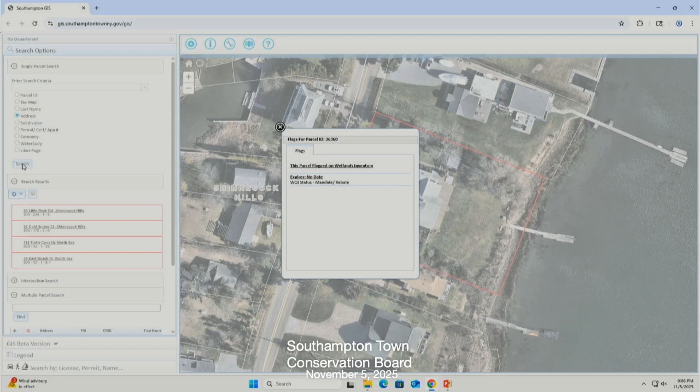Move to waive the public hearing? Resolved that the Town Conservation Board hereby waives the public hearing requirement pursuant to Chapter 325, Section 325-80 of the Town Code. All in favor? Aye. Opposed? A025039, Judy Temmel.

This application relates to a residentially developed property on White's Lane in the hamlet of Tuckahoe. There is a preliminary advisory report dated October 29, 2025 on file. The property abuts town and state regulated freshwater wetlands. The applicant is looking for this board's approval and a wetland permit to construct a two-story addition. There were a host of outstanding issues at the property related to non-compliant fencing and discard of landscape debris. All those issues have been addressed, as the property is located at least 100 feet landward of the adjacent wetlands.

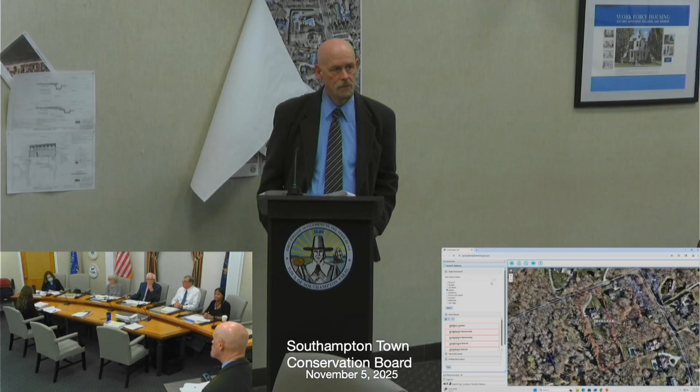There is no need to establish a covenanted buffer on this property. As such, the project is compatible with the wetland permit issuance standards. No significant additional information is needed. There is no public interest in the application. As such, the public hearing requirement can be waived.

Motion to waive the public hearing. Second? Resolved that the Town Conservation Board hereby waives the public hearing requirement pursuant to Chapter 325, Section 325-80 of the Town Code. All in favor? Aye. Opposed? A025033, Gregory S. Little.

The applicant requests postponement until November 19th, 2025. Motion to postpone to November 19th. Second? All in favor? Aye. Opposed?

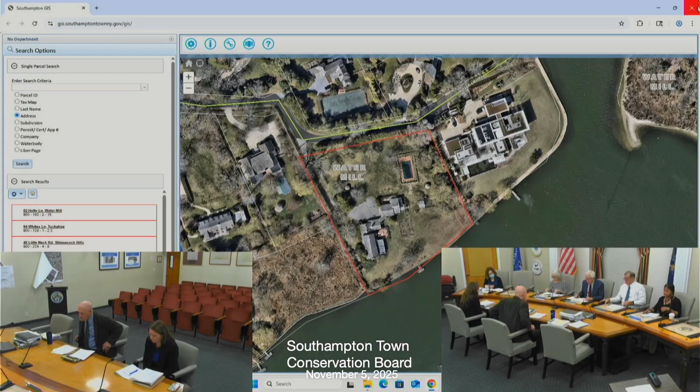Resolution to transfer conditional approval, A024045, Holly Cards LLC. This is just a transfer. Is there a motion? So moved. Second. Resolved that a conditional wetland permit approval be granted to Holly Cards LLC for the proposed project upon the terms and conditions set forth therein. All in favor? Aye. Opposed?